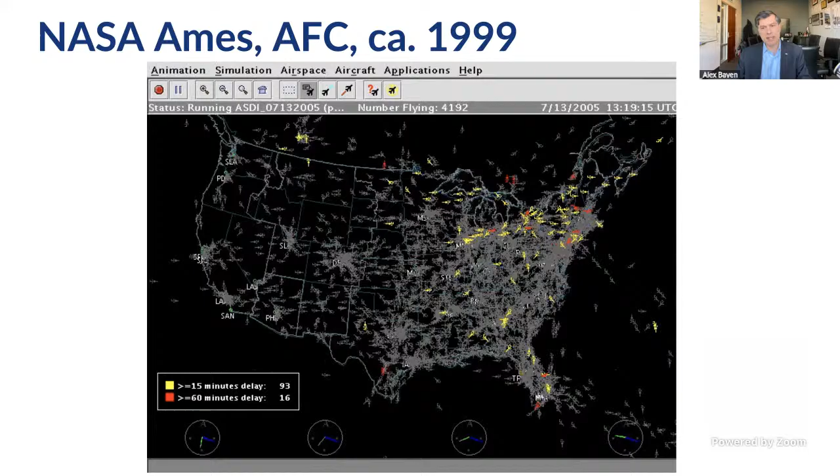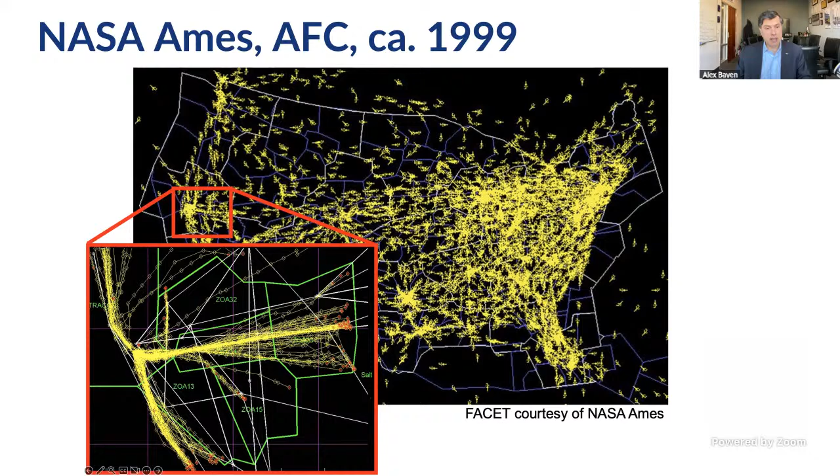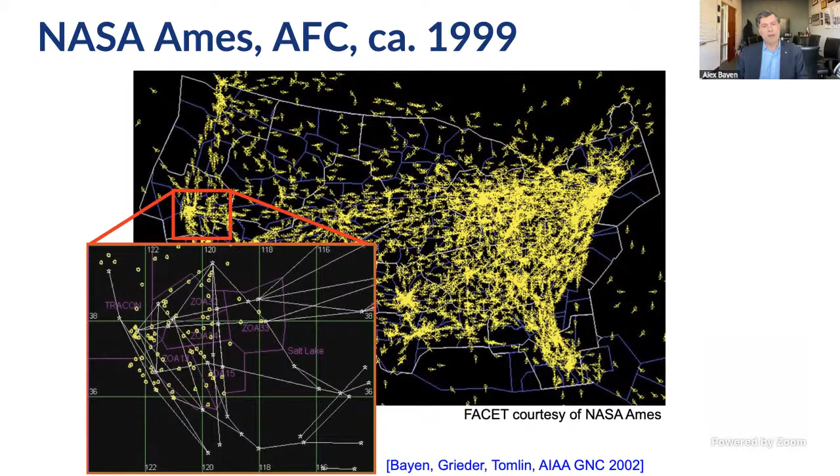And more specifically, some of the difficulties at the time arose in the arrival airspace because of the need to sequence aircraft onto the runway. And so the job that I had as a PhD student at NASA Ames, when I was a PhD at Stanford, was to understand how we could use the modern frameworks of the time, which were hybrid systems, almost a precursor to CPS. And the paradigm, we're talking late 90s, was essentially that we would use the FAA architecture and lay on top of it a set of controllers that can be compatible with the framework.

And the framework at the time had humans in the loop, just like today it still has humans in the loop. So there's a command center which issues very high level directives, and then centers manage multiple sectors, and then sectors work within a given framework and deliver aircraft to the descent and arrival airspace. And so the framework at the time was interesting because in some ways it was already driven by language, but language meant at the same time humans, and at the same time what we thought was a good modeling framework at the time, which is the framework of hybrid systems.

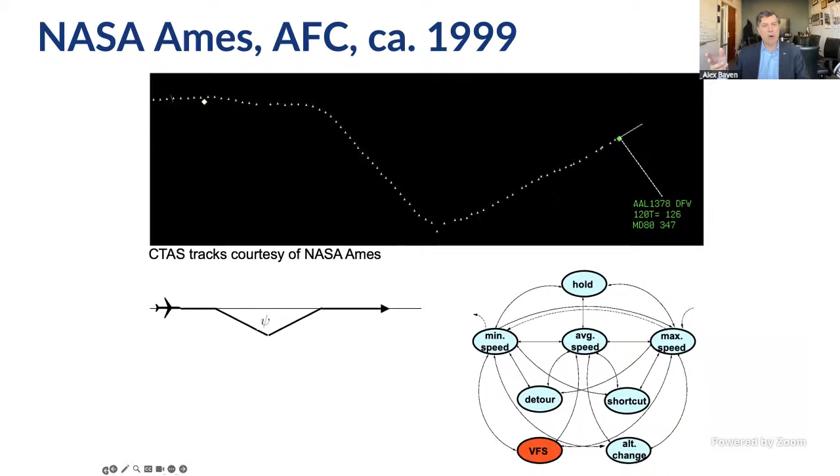So for example, if you told at the time an aircraft to hold, it would be a pattern where they would fly in these loops, which I'm sure many of you have experienced upon arrival if there is too much traffic on the runway. If the delay required for maintaining capacity was smaller, say you want the aircraft to be delayed by a minute or two, then you would do something called vectoring for spacing. And so on and so forth.

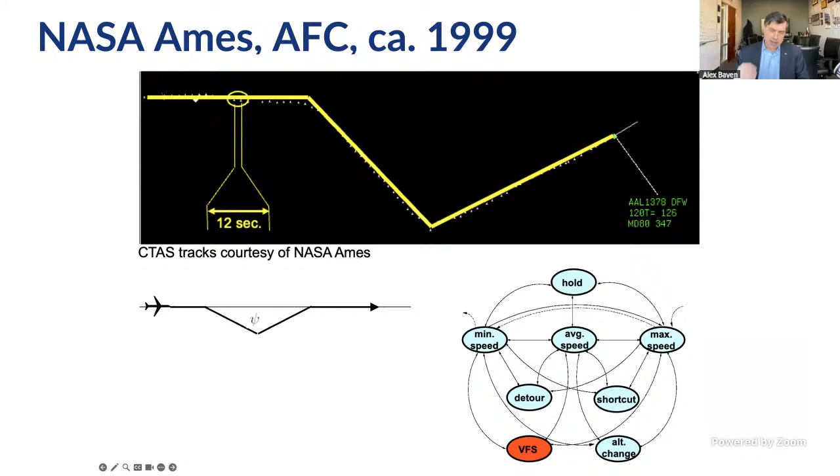And so the idea is that when humans talk with pilots, these things are conceptually easy for pilots to do, and they're easy for humans to verbalize over the radio. And you can see that this is way before LLMs. This is way before even NLP was anywhere close to being able to transcribe this automatically in a way that could enable automation. But the mathematical frameworks for this were already the center of a lot of interest to the community.

And so the idea was that you could essentially work on the synthesis of controllers that would jump between these different modes. And if you summarize the job of an air traffic controller at the time, it's really a way to communicate with the pilot, like switch from this mode to that mode. And then the pilot has a mental model and knows how to do that, which in turn gave rise to a lot of interesting dynamical systems models or hybrid systems models to model aircraft, with the notion that maybe one day an optimization paradigm over hybrid systems could enable this system to work better, and ultimately for this system to be decentralized, or what was called free flight.

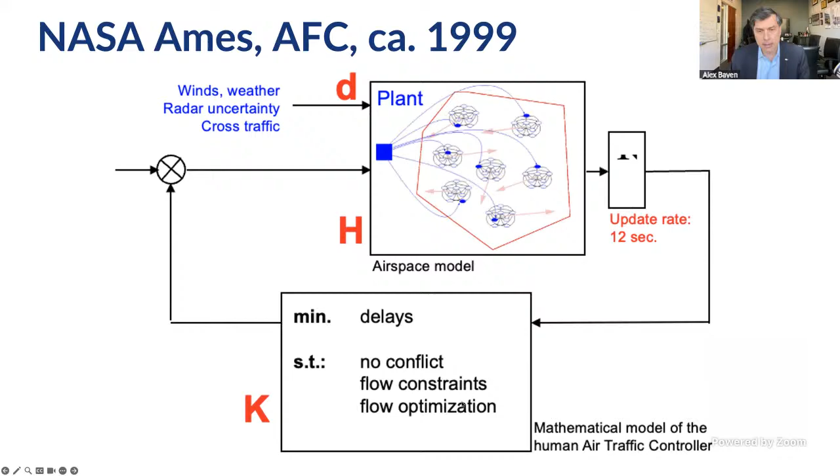And from a controls perspective, in some ways, it's really thinking, okay, so I have a bunch of hybrid systems flying around, and what I'm trying to do as kind of a management of the system, centralized or decentralized, is to build a controller on top of it.

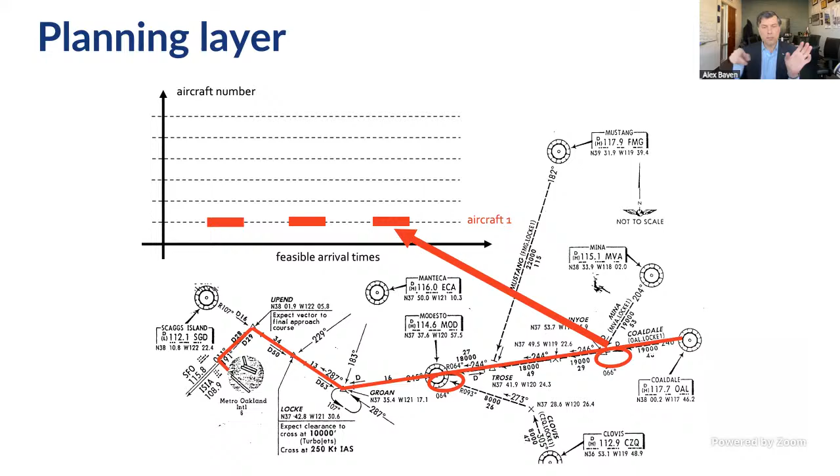So for example, in the very final arrival of the airspace, the idea is that you could fly direct to a destination point, and depending on your descent speed, that will give you a range at which you can land. And then if you're delayed on the way because you take one loop around that point, which is a possible place where you can hold, well, you have another landing strip. And so a third if you do two sequential loops, etc. And like this, you build these kind of landing maps, and you can see where I'm going with this.

It's almost like a feasible set of a mixed integer linear program where you're trying to sequence aircraft across non-convex landing strips, which enable the aircraft to be sequenced and separated on the runway. So you can see how with this, you can essentially achieve high-level planning in a way that is compatible with something that maybe one day will be verbalizable automatically.

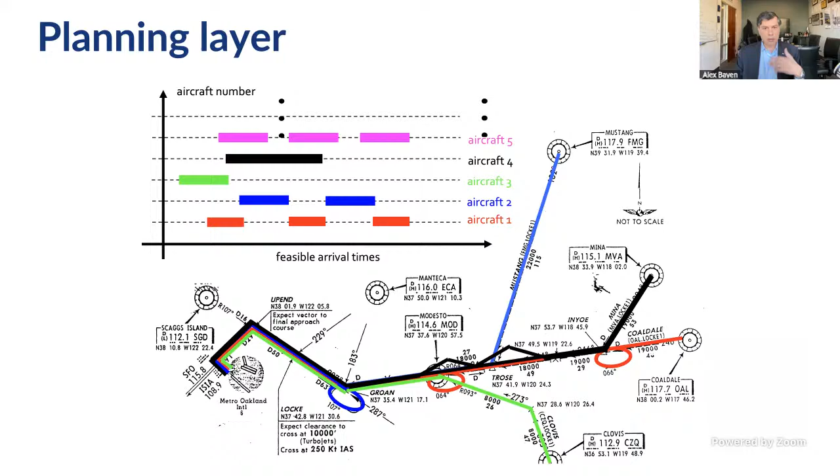At the time it wasn't, but at least it would enable the pilots to work with a traffic controller by being compliant with what was happening over the radio channel, and yet be able to automate that, or at least execute these if they were not flying automated aircraft. And then, of course, at the lower level, you wanted to also ensure that there's no collision.

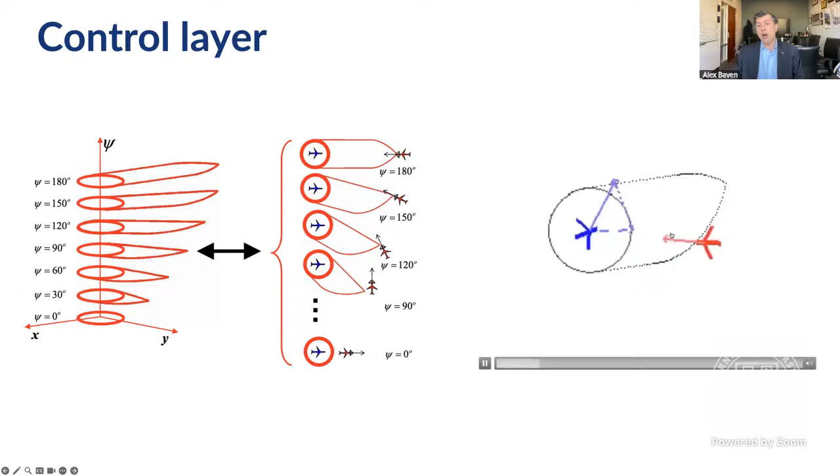So there was a lot of very active work in the Hamilton-Jacobi space, where essentially you would model aircraft as hostile to each other, where one is trying to crash into the other, because if one is trying to crash into the other and you have a controller that always escapes, that's kind of a suicidal attempt. In some ways, it's a version of robustness where no matter what the opponent does, you have a way to escape.

And that gave rise to a lot of the very common today Hamilton-Jacobi framework, which originates with the work of Shankar Sastry and Claire Tomlin in the mid-90s, and then the next generation, my generation, took over as PhD students until the advent of numerical analysis enabled the computation of these solutions in maybe 3 or 4 dimensions.

And at the time, we tried that on specific air traffic control routes. This is an example of flights at the border of California and Nevada, to see if there would be an opportunity for this to run onboard the aircraft, ultimately giving rise to a possibility of a little bit less supervision of the human from the ground and a little bit more decentralization of air traffic.

Some of the students in the group, in particular Rodney Teo, even went as far as implementing this on drones. This is an example of the algorithms that I described earlier that ran in early 2000 at NASA Ames on some of the drones that at the time the students had to manufacture themselves. You couldn't just go and buy things. You just had to build these things, which is why they look so old.

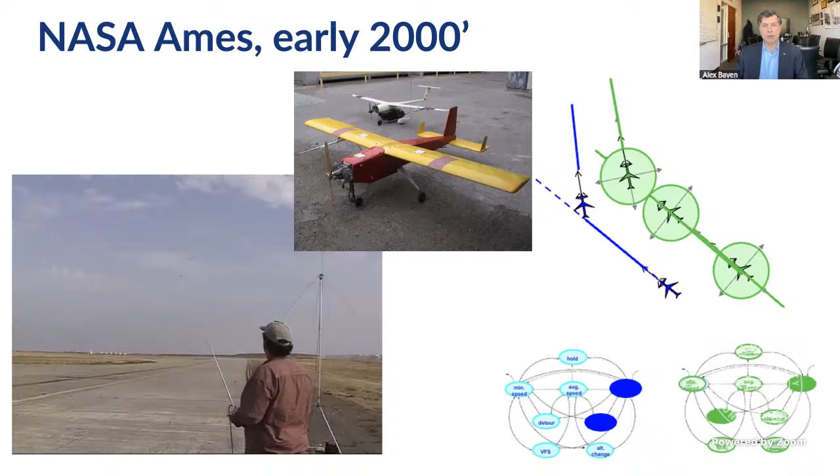But it showed that at least the commands that we issued in the simulations could one day be implemented in automation. So at the time, I think in the early 2000s or late 90s, it was really exciting because people really thought that this would be a next generation air traffic control that might happen in the en route airspace.

And then this happened. September 11th. This is what happened. This is all the aircraft in the United States landing right after the attack in New York, and you can see this is probably the only time in the recent history of the U.S. that the skies were so clear for so long following these attacks.

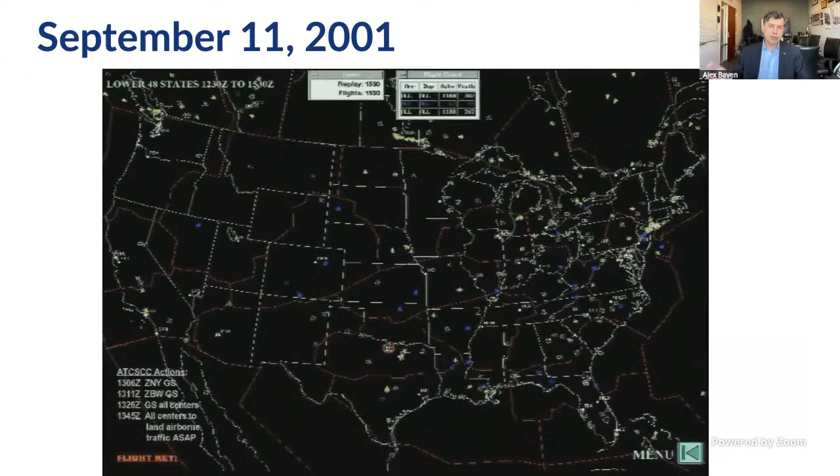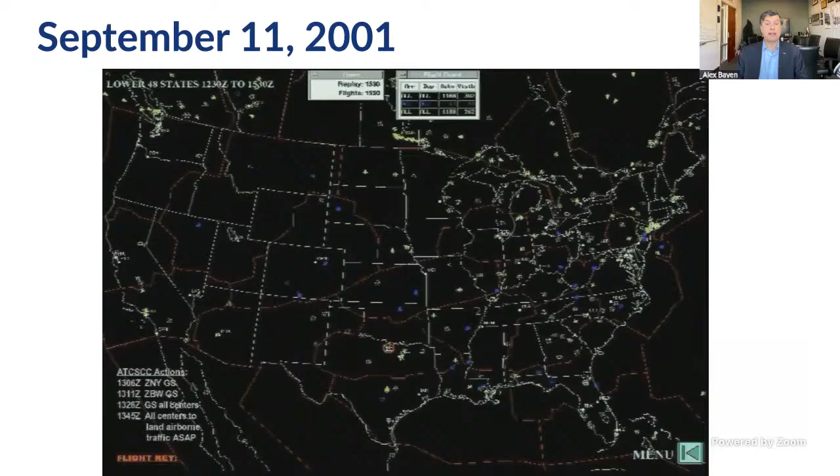Of course, September 11th drastically changed the approach. And in some ways, I think the research in air traffic control automation or human supervision or mixed autonomy really took a dip, maybe a 1 or 2 decades dip, which never really recovered at the en route level or even the arrival level. And it might have happened anyway, but I think certainly we saw a major shift in the way things happened at NASA at the time and even at the FAA just because of the new reality of geopolitics.

So at that time, this is when I decided to switch my research to something which brings us closer to what I'm going to talk about today, even though at the end you'll see they all converge. This was the time at which cell phones started to rise. And so now we're in the early 2000s or mid 2000s, and it's the rise of the IoT. And so suddenly there is a huge surge of information which was not there before.

I mean, in air traffic control, you work with a lot of good information because radar is pretty good. But anywhere else, for ground transportation, information was very poor, very sparse, until phones came along and people thought that you could use the GPS on board the first generation smartphones to monitor traffic and provide information of traffic at global scale. And so this project, which essentially took place at the time we were winding down on the air traffic work, was the first traffic app that was ever deployed in North America to enable traffic information systems to relay real-time information from smartphones collected by these things.

So this is an E71. That was at the time the latest smartphone in the Nokia brand. iPhone 1 did not have a GPS at the time, and there was no Android. Android came a few years later. So we built this first system and we deployed it in North America on RIM phones and Nokia phones. And over the course of 2 years, it enabled us to produce what you see on the right, which of course everybody here has now on their phones for free everywhere all the time.

But at the time, you have to recognize that in 2008, if you were looking for traffic information, the screenshot of the website is really what you would do. You'd go to a desktop, you would just click, you would look at the route which has congestion, and then you would just hope that things stay that way. We were very excited about that project because it was the first opportunity for us to do a lot of data assimilation at scale with partial differential equations where you have Lagrangian measurements, which are essentially measurements along the phenomenon you're monitoring.

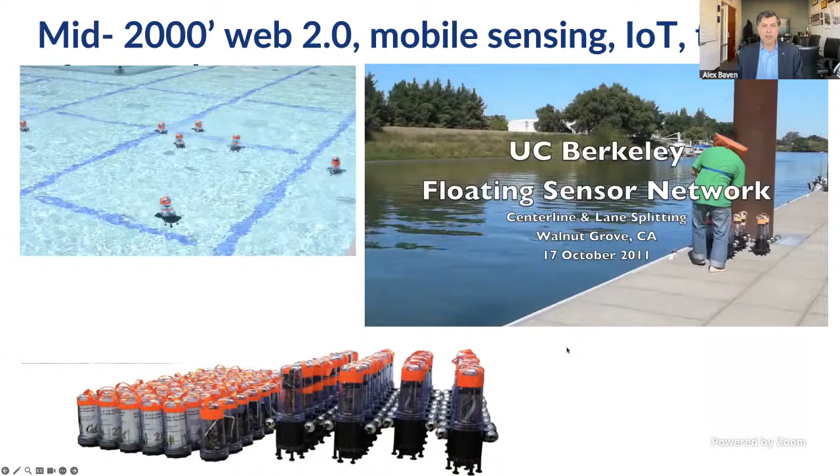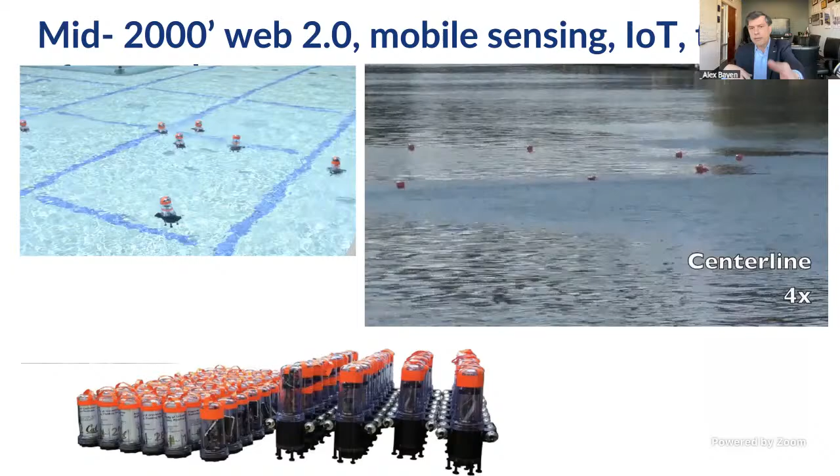And so along that same token, because we were really interested in Lagrangian monitoring and still in the context of these multi-agent systems, we also were interested in water monitoring, which is not that different in some ways from traffic monitoring. You have some form of stream, and the stream pushes the little floaters, and then the floaters can monitor, they can move eventually to monitor things where you want them. They can radio it back. In fact, this was the first time that we put floating phones. Each of them has a phone inside. And then the same algorithms in the background enabled us to essentially reconstruct the traffic in real time.

So what you see here is some deployments of these sensors from our boats. And then you can see some aerial view of what they are. And you can see particles that are modeled by either the shallow water equations or very easy versions of Navier-Stokes 3D, with real-time data being streamed in by this.

And this is important because I think today in automation of the large-scale systems we're interested in, there is a closed loop where the monitoring is now possible. This was not possible for sure 20 years ago. So this was the first attempts to do this with traffic, like I showed, with water. Then we also did that with earthquakes. And so this is here another interesting thing.

As you remember, iPhone 2 had accelerometers in it. And so we were the first app that monitored earthquakes by using the accelerometer data from the phones. And then what you see here is a shake table. So these are usually built to shake big things you built out of concrete to test their resistance. But here, what we wanted to demonstrate at the time is the ability of a very low quality accelerometer to capture accurately an earthquake, which has a pretty low bandwidth. Obviously, these are slow variations.

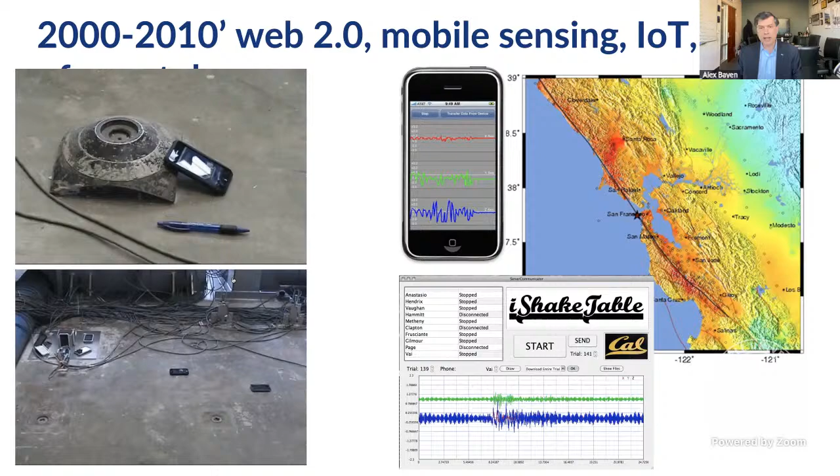And again, with the same idea, with the rise of the IoT and Web 2.0, it would become more and more possible for large-scale infrastructure systems to stream data or natural phenomena to be captured by these, and the phones were one of the many vectors that was possible. And so that led us to the idea of large-scale control of networks. So since we couldn't really do it in the air because the paradigm had been frozen after September 11th, we decided maybe some of the same techniques could be used on the ground.

And so at that time, smartphones were rising and data became available, at least if you're working in infrastructure systems. This is an example of data we collected from the 500 taxi cabs in San Francisco. Just to give you a sense, this is now, say, around 2008 to 2012. Today, there's 40,000 registered Uber drivers just for San Francisco. So the scales, even between then and now, are logarithmically at least one or two above. But I'm showing this because this is how in some ways the infrastructure came online.

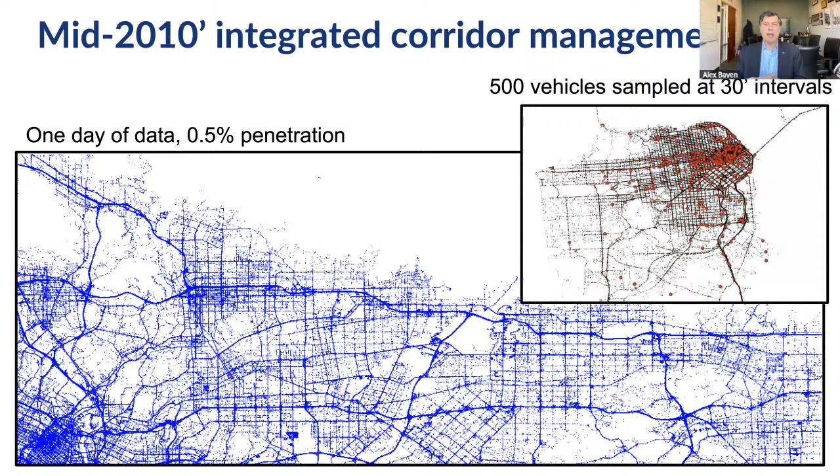And at that time, we had probably written over a dozen papers on data assimilation. So how you take these mobile measurements and you include them into live traffic maps to operate the infrastructure. So that enabled us to start thinking about how you build such a system. For example, for the geography we were interested in at the time, about 2010, typically for a corridor in LA, like the 210 corridor you see here, which spans a few suburbs of LA, you'd have something like 500 control points. So that means essentially there's 500 traffic lights you can probably integrate into a single decision support system and use that data to improve some of the metrics you're interested in.

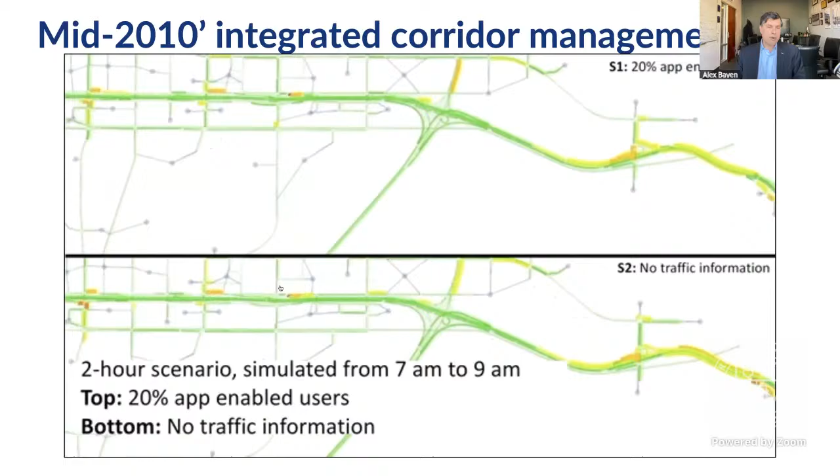Some of the metrics might be travel time, might be total vehicles traveled, might be VMT, might be CO2. There's different metrics. They're not all aligned. But the idea is that we were interested at the time to put these infrastructures online. And so we were doing this also in light of traffic information. And the idea there is that if you have an accident, and in one case 20% of the people have a smartphone and follow their smartphones, traffic will behave a certain way. That's what you see above. And if they don't have that information, traffic will behave a different way. And that's what you see below.

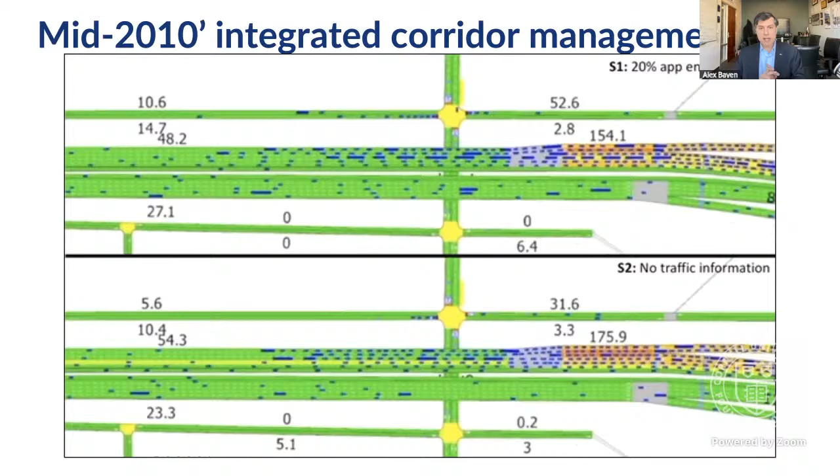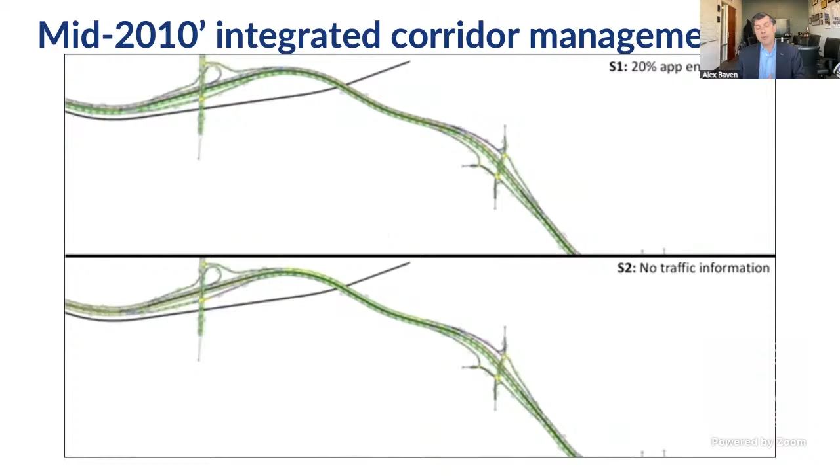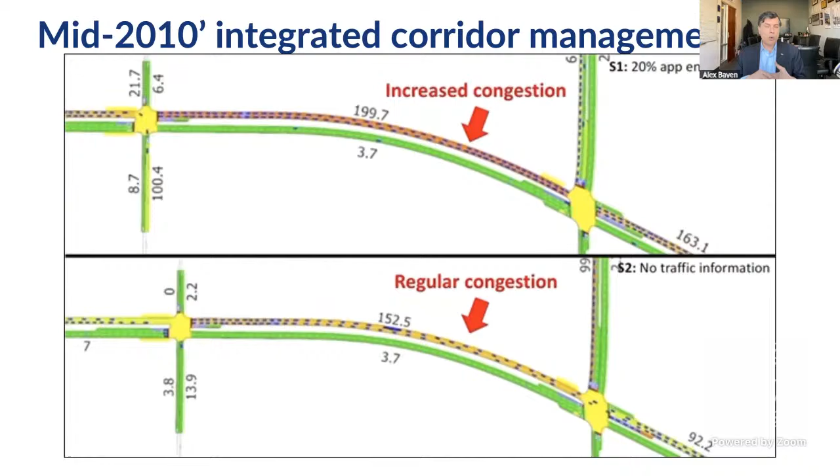And paradoxically, as many people discovered in the 2010s, the more information you give to people, sometimes the more problems you can create, because everybody gets the same information at the same time. And there's some very classical economics theory which shows that then people will all choose the same route. And because of that, instead of creating a social optimum, you'll create something which is closer to a Nash equilibrium. And then there's a price of anarchy. And the way it materializes itself is that it increases the level of congestion, when in fact, if people had not been given the information, paradoxically, things might have been better. So at that time, the whole ecosystem of control theory was discovering this paradox in practice. This paradox has been known for a very long time.

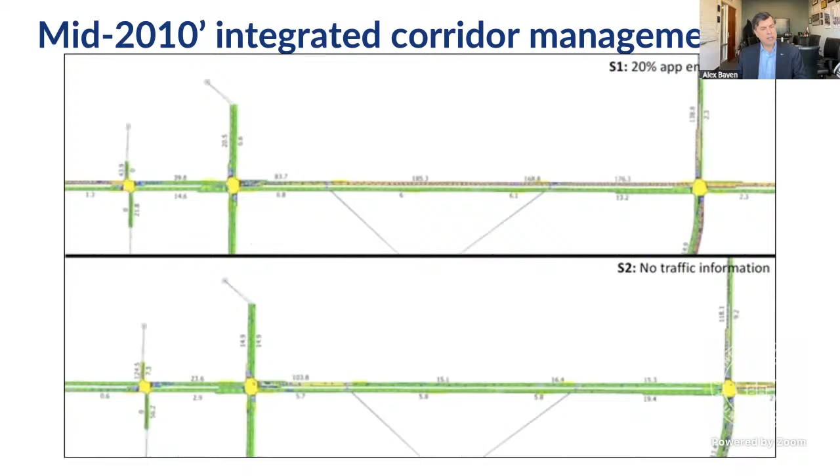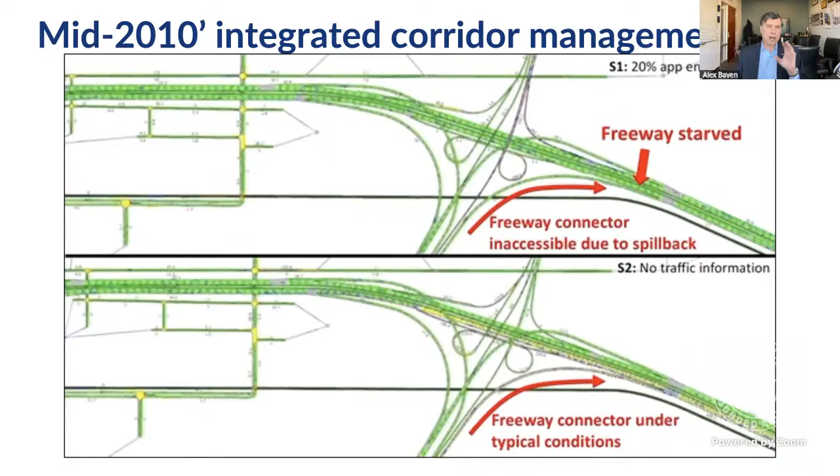I mean, I think the PhD of John Nash is in the 50s, the Nobel Prize was in the 90s. But it was the first time that things began to grow at scale so much that people could experience it. And so these are things we were interested in at the time in terms of the multi-agent controls that we were using for the traffic light coordination system, and possibly the idea that we could one day coordinate the information in the way it's conveyed to people with the infrastructure management.

And in some ways, it took 15 years for this to happen. So we realized that problem in 2010. And finally, we have a paper coming out in a few weeks with a major traffic information company. I can't tell the company because the paper is not out. It's going to come out in Nature. But this is the first time that this type of paradox was realized and implemented in an actual smartphone app to provide routing guidance that is not going to lead as much to a Nash equilibrium as you could.

And so this is another interesting thing because the reason it took 15 years is that the interface between what's happening at the infrastructure level and what's happening at the private sector level for these guidance systems is jurisdictionally very secluded. So fast forward now 5 years, we see cars coming up with some levels of automation. So say the late 2010s is glorified cruise control systems, then adaptive cruise control systems, then maybe one day cooperative cruise control systems. And then some companies like Tesla were among the early ones starting to suddenly raise the level of automation from 1 to maybe aspirationally 5, which we of course see now, or close to 5 with Waymo.

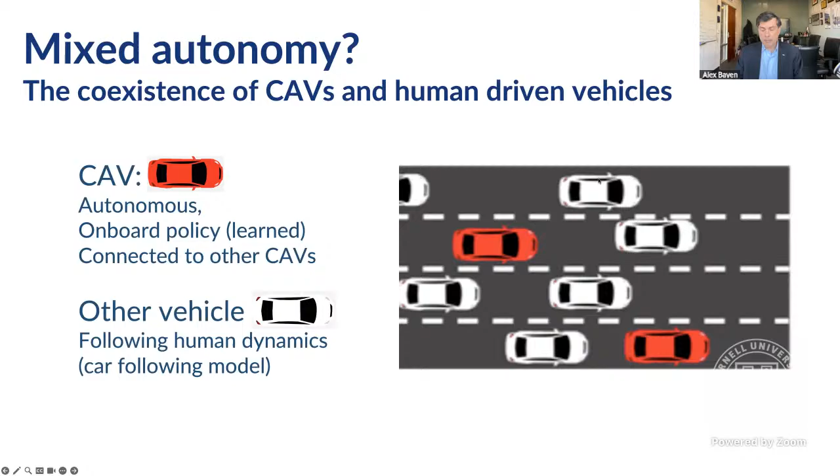So for the next 20 minutes here, I'm going to use a color code where in red we have some vehicles with some level of automation. So not fully automated. Think of whatever car you can buy where there's some form of autopilot which will wake you up if they need you, and otherwise will probably take care of you. And then they interact with other vehicles, like my vehicle, which has absolutely no automation, that I drive myself, and therefore have a specific behavior, which is the behavior of the humans driving it.

And there, the idea is that the V2V paradigm is not there yet, and it's going to be probably a decade and a half before it's there. But with very crappy systems for transmission, such as the cell phone system, very unreliable, very low bandwidth sometimes, very high latency sometimes because of coverage, you could still transmit information kind of like in the old air traffic control world, very high level, but you cannot transmit reliably high bandwidth information, which is an interesting control problem now, because essentially you could possibly use this to do high level coordination of vehicles, hoping that you can develop a low level controller that can control it.

And with that, do what we used to do with air traffic control: if you give some information to specific vehicles that have a distributed capability to control the entire traffic flow, you possibly could improve things on the ground. So we became interested in building a system where, so this is the beginning of cloud now. So we're talking 2014, 15, 16, 17, where running things on old stacks of computers was becoming obsolete, and the cloud could support much faster paradigms. And the idea was to have a very fast computational framework on the cloud, transmit very high-level guidance to vehicles, so low bandwidth, high latency, and then the vehicles run a local controller that could absorb this information to improve traffic.

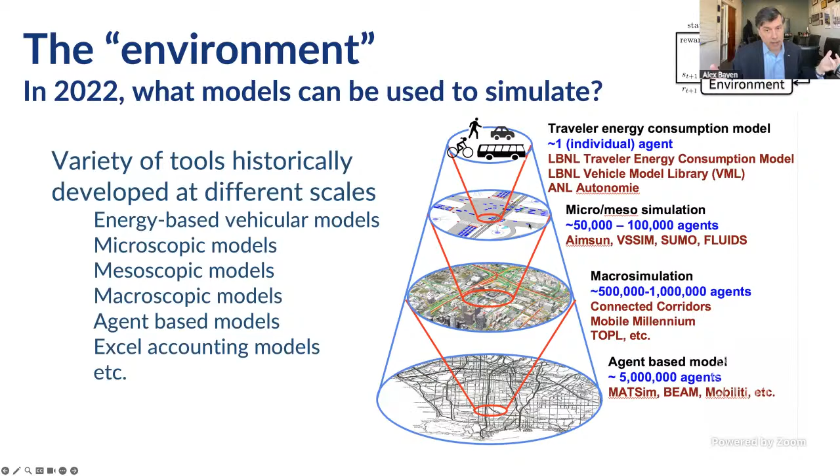So when I started at Berkeley working on air traffic control, that data and that compute was not there. When we started working on this integration in the late 2010s, so 2018, maybe 2020, not only was the compute power there with the advent of AWS, but also the data I've shown was enormous. And so now there was enough data to do simulations with maybe 50,000 vehicles and then run them in batches to teach an algorithm how to devise a policy.

So in 2017, we were the first group to integrate these three things on the cloud. So the cloud was the platform now. RL libraries were coming out of the lab, very fresh and open source. And traffic simulators were tractable in the compute environment we had. So we built that platform.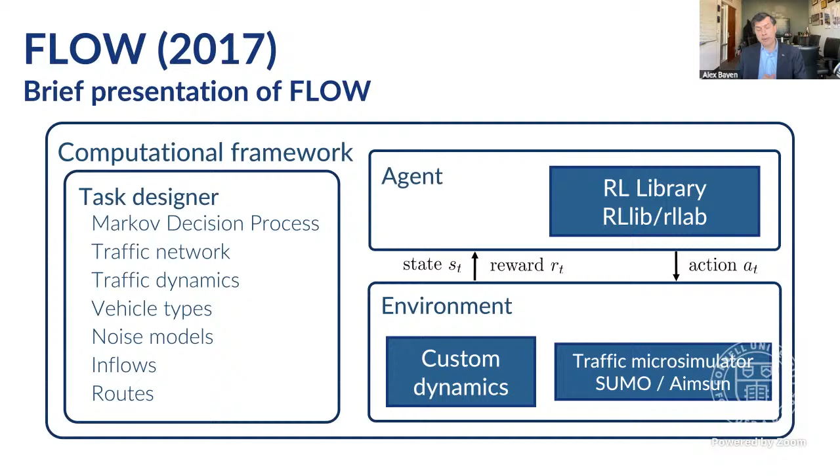We called it Flow. In fact, Aimsun, which is now owned by Siemens, rolled out their first cloud version for us. We were the first implementation in the history of the company. And of course, at the time, SUMO was an open source framework we could use as well. And that's the platform we use to train our policies.

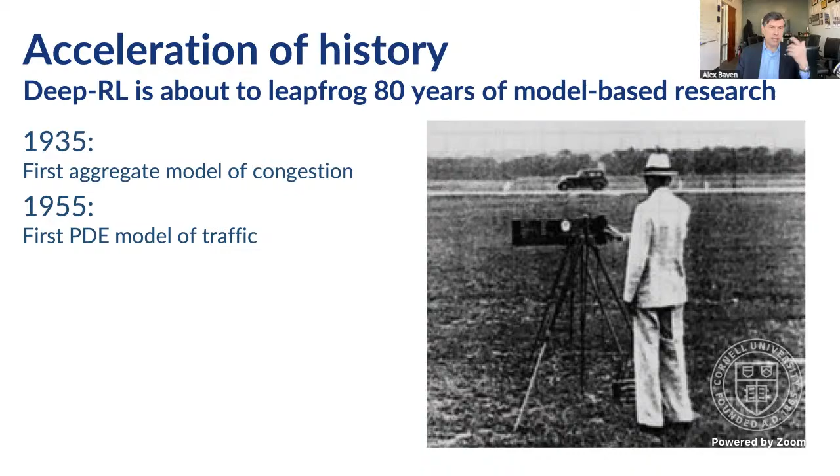And so this is an opportunity to maybe do a little bit of a leapfrog back in the model-based research world, because traffic models have been around since the 30s. This is a picture of Bruce Greenshields, who built the first aggregate model of congestion, at least to our knowledge. It took 20 years for the PDE community to notice and integrate this in hyperbolic first-order conservation laws. And it took another couple of decades before people started thinking about instabilities in these things.

They actually measured the gas and the fuel consumption. And so this was eye-opening for us because suddenly we could see the convergence of deep reinforcement learning with field operational testing at a time when stacks in vehicles could enable such things to work at scale. And so this enabled us to rethink the agenda.

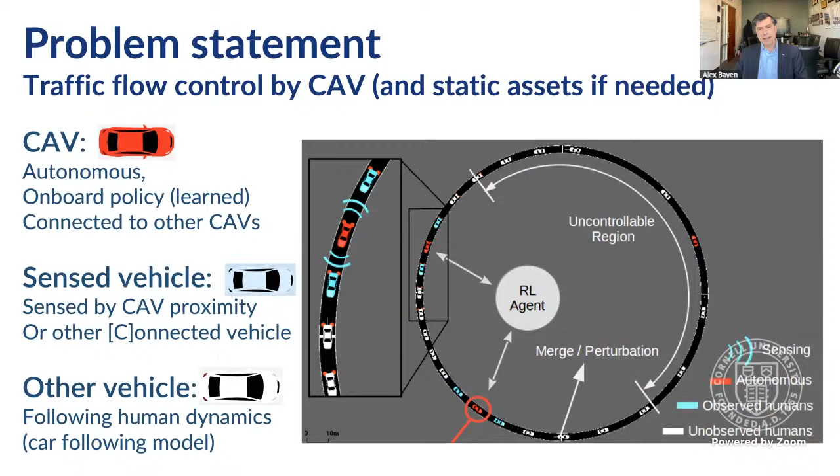So we tried that on a variety of settings at the time. For example, you can generalize this setting to a two-lane ring. And so it's interesting because here the policy discovers that by switching lanes obnoxiously, like I'm showing now, you can stabilize two lanes by disabling people to pass you and forcing the speed on them. Obviously, it's black box deep reinforcement learning. So I'm just verbalizing something which the PPO we used at the time discovered by itself.

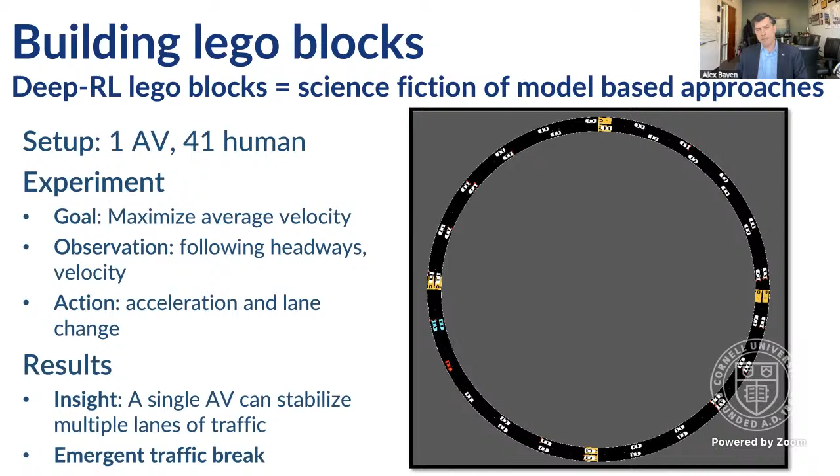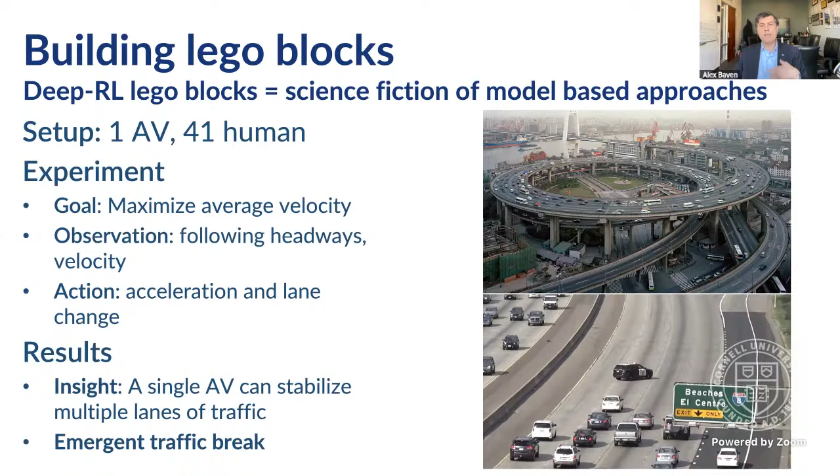And you could say, well, that's pretty intuitive because in some ways that's what a snail operation does, right? A snail operation is something used by the police when you reopen an asset like a bridge. You don't want people to go 150 miles an hour, so you kind of limit the speed up front. So you could see maybe the deep reinforcement learning had some form of human behavior or emergent behavior it captured in the optimization, but it was certainly not by design at the time.

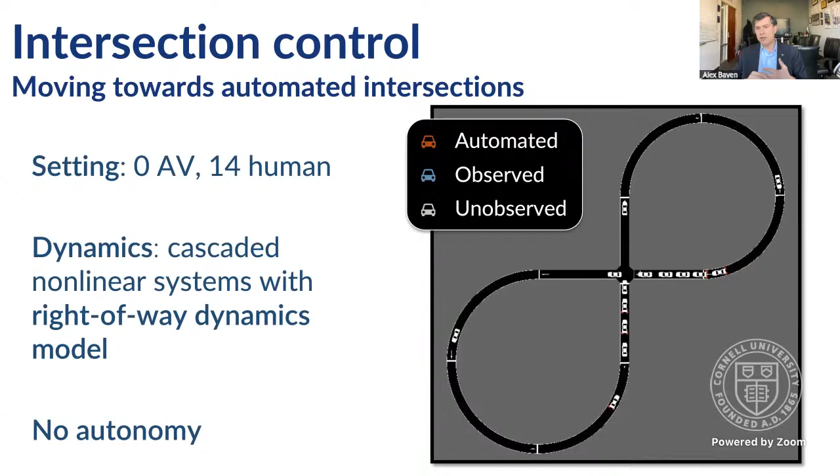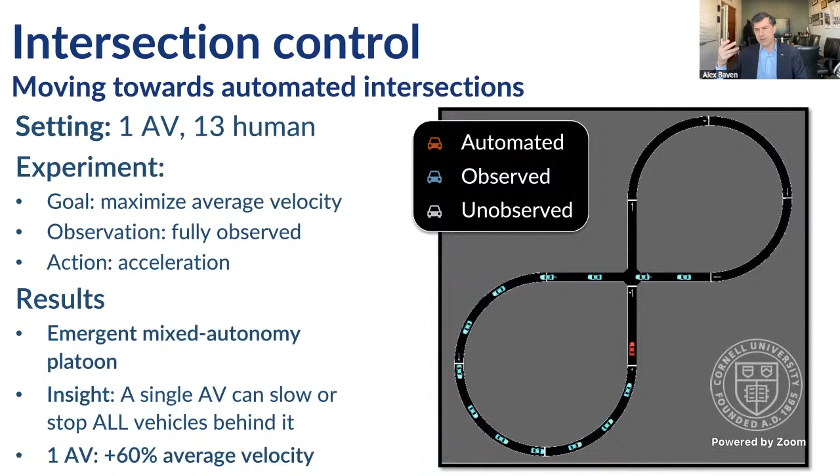Other things we were experimenting on is things like this, which is the worst possible way to manage an intersection. You put stop signs, which maximizes both travel time and emissions of CO2. But if you make sure the algorithm has vision over all the vehicles, it actually learns the proper speed at which it should travel. So the intervehicular distance makes the length of that snake into half of the 8 figure. So it's kind of interesting that, again, it figured this out. Which is another way to say that it rediscovered platooning if you plot this in time-space diagrams, for people who have taken a transportation engineering class and used that framework.

I'm going to skip a bunch of different things, but other things we were trying to do is transfer learning. It's like, can you learn a driving policy on a ring and implement it in real life? So the idea is that here you want to test things where waves are generated at intersections. So when there's an intersection, it creates a back propagating shock wave. And when that back propagating shock wave happens, then this is when the energy inefficiency happens.

And then so if you have knowledge of that shock wave, the car figures out that it should slow down, because if it slows down early, then essentially by the time it reaches the merge point, there is no more wave. So in some ways, it has enabled all these vehicles behind it to not stop and go. And so the savings are quite substantial.

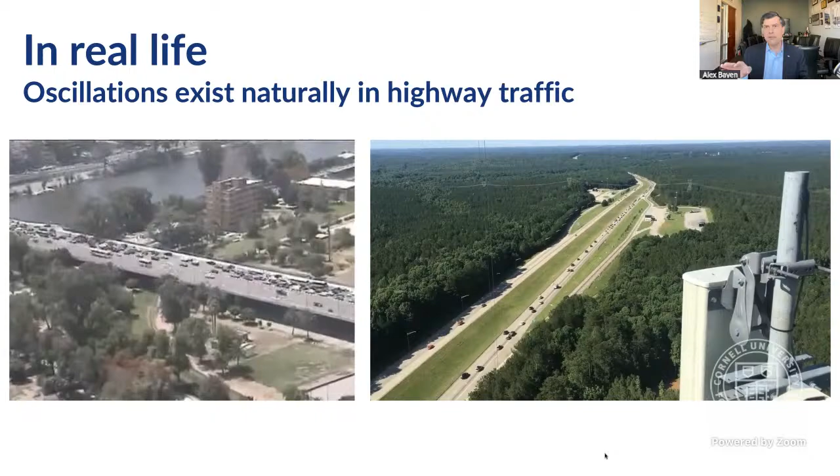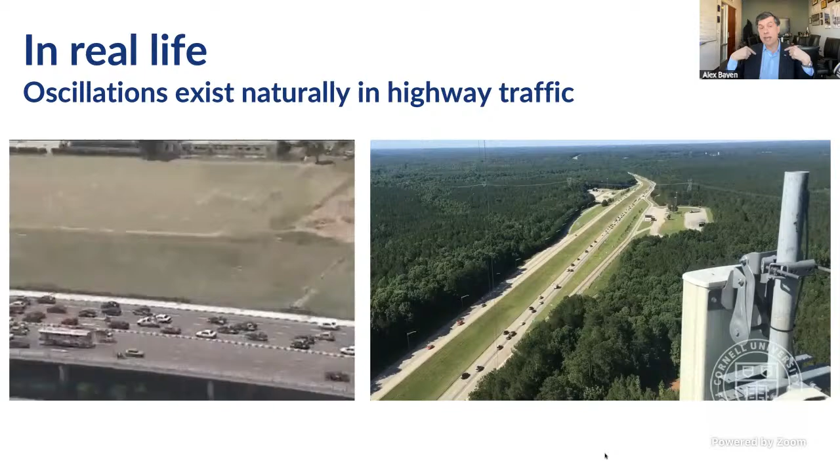So here we're not trying to fix traffic in fixing this. We're trying to fix human efficiency with automation, which is a very different problem. We're not going to change the number of people going onto the freeway. That's not our ability, but we have the ability to change their behavior once they're on the freeway.

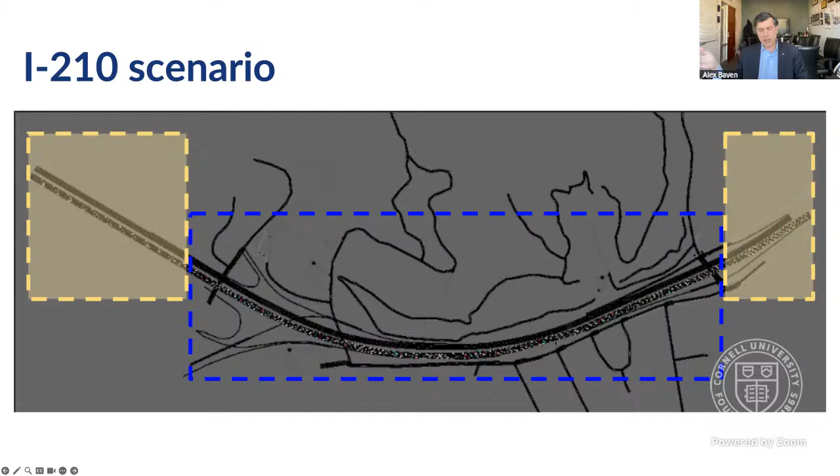So to tackle that problem, we first thought that we would use the setting I showed you earlier in 210 in Southern California. And so we started building these gigantic models. And so it's going to be hard to see over Zoom because there's a bit of a stroboscopic effect given the frequency and it's an accelerated movie.

But what you should see, if you see my mouse, is there is a pocket of shock wave that is forming on the right, and it's progressively back propagating into the box. Now it's entering the box, and if you look in the box, suddenly traffic gets much slower, and then you have these oscillations back and forth.

There's a bunch of red cars, but right now the red cars are not turning on the controller. And then in about 15 seconds, you're going to see blue cars appear. And when that happens, that means the red controllers have turned on the policy they learned in black box simulation.

So here the notion was, why don't we use a fully calibrated micro simulation model that we happened to build for District 7 at Caltrans? And why don't we use that to devise a policy that would run on these? See, it happened now. The cars turn blue.

So now visually, I don't know if you can see this over Zoom, but things are much smoother. The total number of cars flowing in and flowing out does not change. We don't change the supply demand inbound and outbound ratios, but the flow has way less variance in speed, which is what this mixed autonomy work we were doing is trying to achieve.

So that was the work at the time, and so then we went to talk to a few agencies and demonstrated that we could run this in hardware. So the idea was to do transfer learning from pure simulation to hardware. So this is far from being the I-210 in Los Angeles. This is the last NSF CPS meeting before COVID.

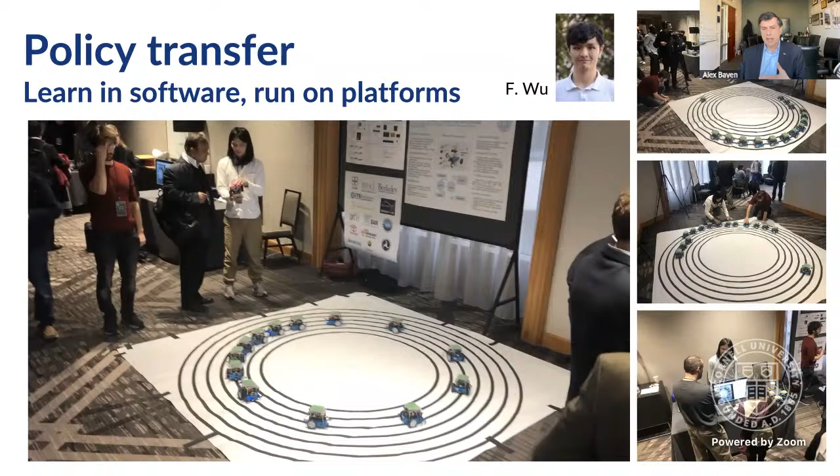You can see Eugene Vinitsky on the left and Fengyu Wu on the right. And this was a way to demonstrate to the NSF that we can run this in the hardware.

And of course, this is, hi, Andreas, this is your stuff, back in the days at University of Delaware, and I know you have a much better version here in Cornell. This was another example we ran together with Andreas's group to show that we could transfer. This was a sequencing policy. You can see on the right.

We control the vehicles in a way that the last vehicle leaving the roundabout, which is the Hummer on the right, leaves before the one on the left, which is the baseline policy. So showing that this sequencing policy we had learned in black box deep reinforcement learning could be rolled out from the simulation to the hardware.

And this experiment that we did thanks to Andreas's group at Delaware, so the Gen 1 simulation city, was essential in us going to the DOE and saying, look, okay, we've pushed it as far as we can in the field of hardware. We're now ready for real-time deployment.

And Kathy, in the meantime, has joined Waymo, and so it's a nice continuity also in terms of the industry and where students work. So going back to the experiment of 2016, this convinced us that we're ready for larger experiments. I'm going to skip the 2018 experiment that was run by the Vanderbilt team.

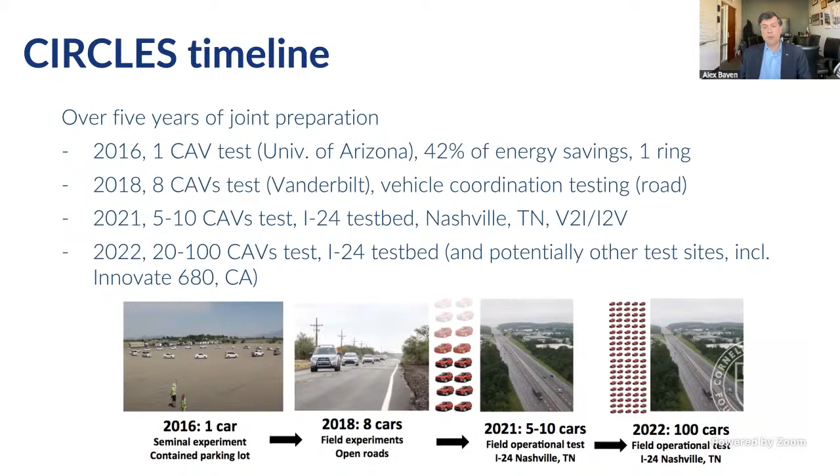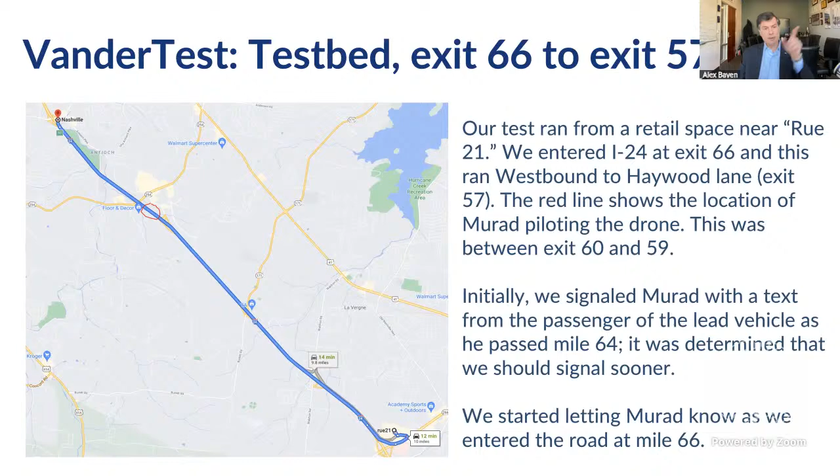And essentially then came 2021, kind of the middle of COVID, we decided to do a 10-car experiment in which we could essentially control things on a single lane of freeway at scale. So we chose a stretch of road close to Nashville and Smyrna, about a 5-mile stretch of actual deployment. And essentially proceeded in some form of funeral style.

So putting all the vehicles on the freeway in a sequence and then letting them operate on the freeway without controlling people, which essentially means, for the experiment, we ran 4 actuated vehicles in red, some extra vehicles in blue we had inserted just for monitoring the experiment, but not controlling, and then a bunch of people in between that come in, come out, and merge into your lane.

And what we noticed, so we managed to catch usually 1, 2, sometimes 3 waves over the experiment. You can see them in the trajectories. Here, red is when you slow down. And what was really encouraging at the time was that we were able to demonstrate a saving of 16% in our own vehicles that we could measure. So essentially saying, if you run the algorithm, you save 16%, or you have 16% more miles per gallon.

But what's really interesting too is that if you look at the vehicles straight behind our vehicles, even though they weren't necessarily participating in the experiment, because they had to comply with what the driver in front of them was doing, they also saved energy. And of course, the effect goes down as you go further away from the initial vehicle. So this was very encouraging because all in all, it showed that the overall savings we should achieve should be really good.

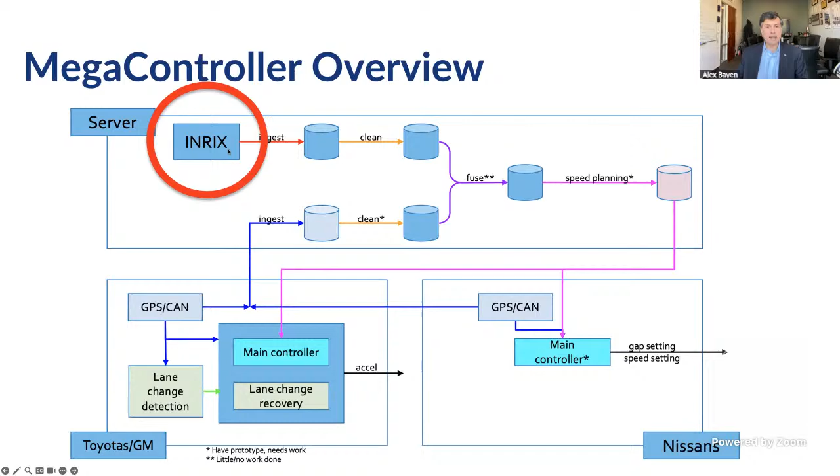So we built that system, and now it's interesting because if you think of my very first diagram of the air traffic control, where you have a planning layer and a control layer, this is not that different. So ideally, a system like this operates at a very high level and queries data in real time. So for us, we bought data from INRIX, and that data looks pretty crappy. I mean, that's not their fault. It's just the granularity at which it's produced.

So every 500 meters you have a speed measurement, but you can still differentiate with very basic machine learning what is a bottleneck here, you can see the horizontal, and what is a stop and go wave. And the stop and go wave is what you want to shave if you're trying to save energy. So that type of measurement, which is ingested in real time, enables us to know exactly what the target is for the algorithm.

And so the idea is that at a very high level, on the cloud with infinite compute power, as much as you need, you can compute a speed plan. And a speed plan is essentially the same as what air traffic management will give to an aircraft. It's like, you're going to fly at this altitude, at that speed, and that defines your arrival time. And based on that, your sequencing is very similar for distributed vehicles. We're going to give you a speed plan, and at some point you're going to drive at weird speeds, which are not as fast as you could go, but that's how you smooth traffic.

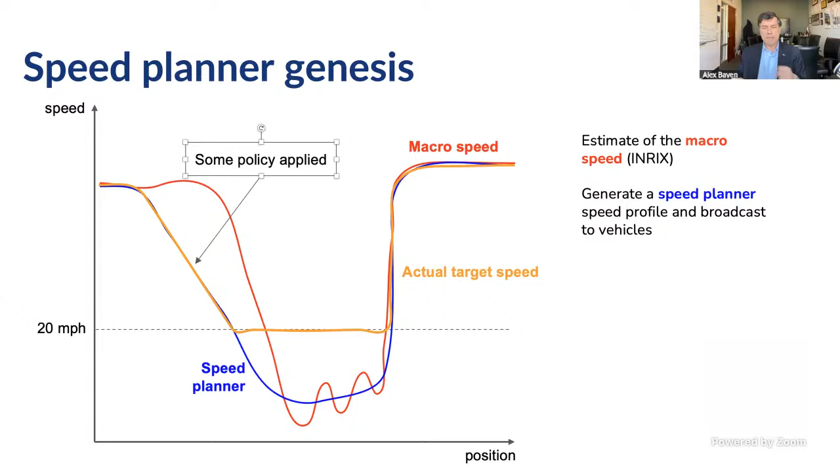And so there's many ways to formulate this. But one thinking at the time was that, in order to avoid what's happening often, which is the red thing, where you lose all your energy, you would want the blue thing here, which is much better. But because of social norms, you should not be driving on a freeway at 10 miles an hour, even though it's better for overall traffic, because people are going to be mad passing you, so you have to clip it at maybe 20 miles an hour.

And in practice, when you run this on data, that's what it looks like. So essentially, it uses this INRIX data I have shown with a space forecast at the present time, and then a time forecast if you have a forecast model on top of it. And then the speed planner defines a target speed, which is this orange curve I'm showing here, which is what you push to your vehicle.

And so that's essentially what you can afford to push over a cell phone network, because cell phone networks have these high latencies and low bandwidth, unreliability. But even if you push a speed plan 15 seconds late or 30 seconds late, the time scales at which the physics of this system operate is a couple minutes. So it's still valid by the time you get it because it's timestamped. So that is something you can reliably do over the cell phone network, even though you don't have a V2V paradigm with a very high bandwidth.

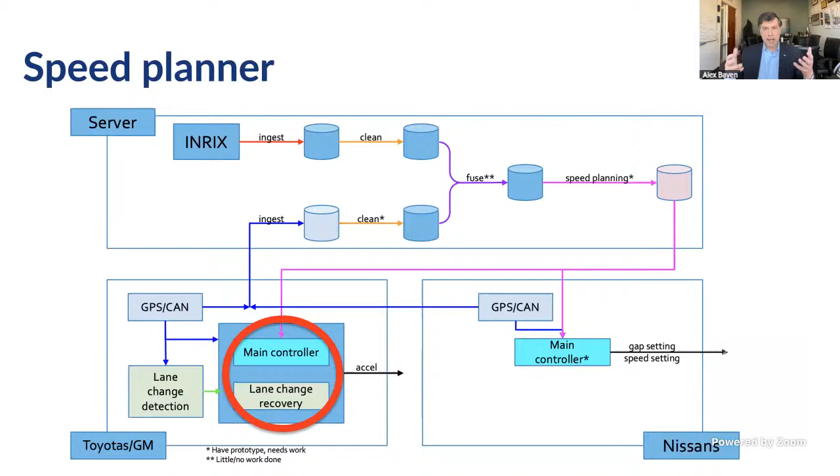And so the idea is that this type of data gets fed to the controller, and then the controller uses it as a target, and then does all the local level conflict avoidance and control. So for that, now we're 2020, and so deep reinforcement learning is very mature. There's lots of libraries we could use. So essentially, we used some reward functions that operated at the system level, in which we could reward vehicles for the energy consumption they would essentially incur in running these algorithms.

And it's complicated because for many people who have done reinforcement learning, there's a lot of dark art and magic in finding the proper reward function, so you don't get either absurd solutions where all the vehicles stop because it's better for energy, or other artifacts of the optimization, which are not very physical. So we had to add things like variance of the speed and maybe some norm of the acceleration and so on and so forth. And of course, deep reinforcement learning, at least the way we were using it at the time, is absolutely not certifiable and verifiable. That's just the way it was, especially if you're using black box deep reinforcement learning to learn the policy.

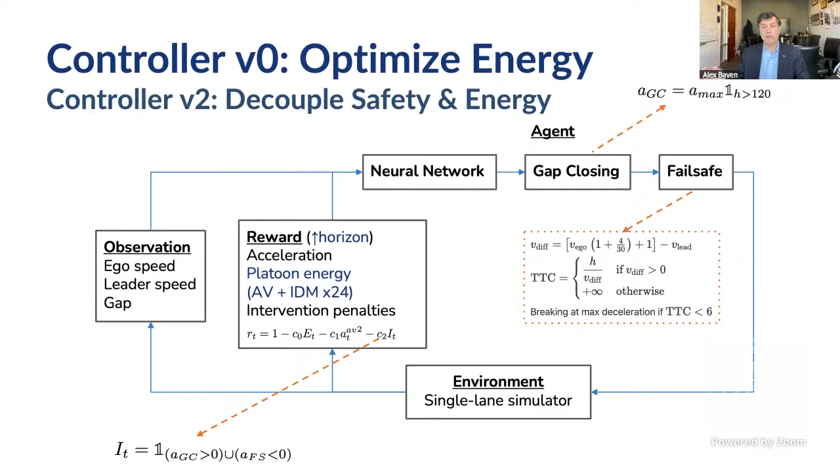You have to have some form of filter, which we used in our time in the form of the follower stopper, which is one safety filter. Then we had another safety filter with a clip function, and then the car itself has an anti-collision system on top of it. So there's like 3 layers of safety on top of it because it's dangerous. And what it does is actually pretty standard and intuitive.

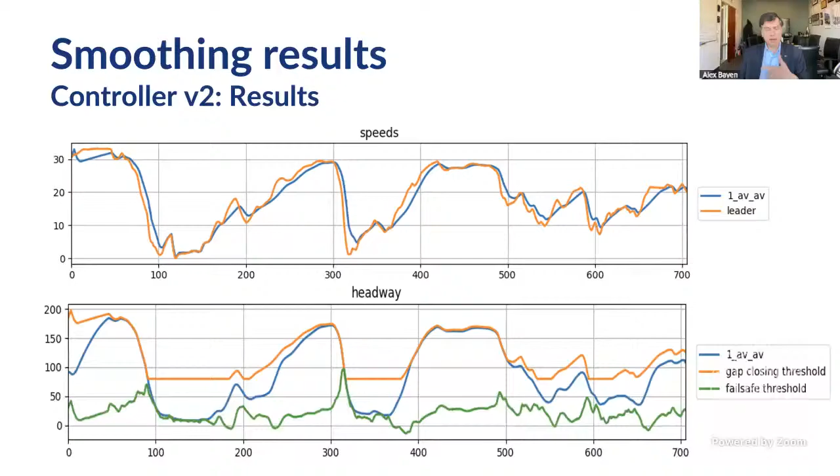And so all it's doing is it's using the speed target to understand in anticipation how much you would change your speed, and then the low-level controller to make sure that the policy as indicated by the speed planner is executable at the lower level and produces these savings. And so we could already see with single vehicles a lot of savings, and that enabled us to really gain confidence in terms of scaling this up to a larger test, which is when we created the MegaVanderTest.

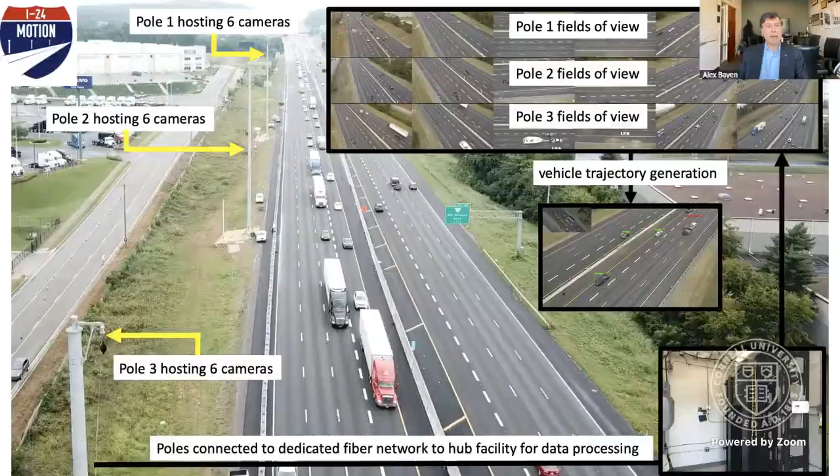So we brought about 50 to 70 students to Vanderbilt University, and a bit Ocean's 11 style, created our own org chart, and essentially rented a factory to host everybody. And first question is like, why did we do this in Vanderbilt? Because at the time, Dan Work and Jonathan Sprinkle were building this amazing test bed, the I-24 MOTION test bed, which is the best instrumented freeway in the world, by putting a bunch of high-resolution video cameras every 500 meters on that stretch of freeway.

So this is a multi-million-dollar investment from the state of Tennessee and a variety of other agencies, which Dan Work and Jonathan Sprinkle put together, giving us an opportunity to be the first test run on that freeway to demonstrate the technology. What you see now is they are erecting these poles, and this is really a couple months before the experiment. We were really lucky with the timing here that they were building that huge monitoring infrastructure, which we later used to produce the time-space diagrams that were used by the team to build the data. And so we put all the students into our field headquarters, which is this factory or offices we rented at the time. And then the students started mounting radios and all the infrastructure.

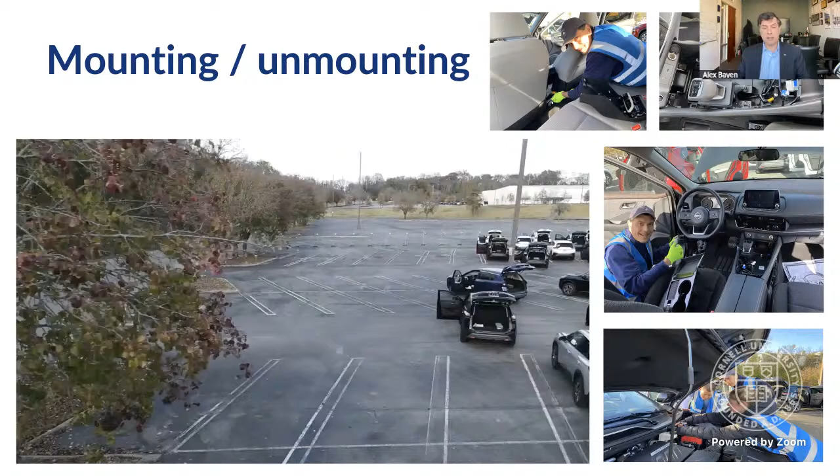If we're going to run an experiment with 100 vehicles, you need to build about 120 or 130 hardware, factoring the kind of break things along the way. And then they taught us how to unmount panels in cars. You can see all of us mounting and unmounting things, bypassing the electric system to power our own electronics from the vehicle, and so on and so forth. And essentially, one by one, deployed this into the vehicles that we deployed on the field.

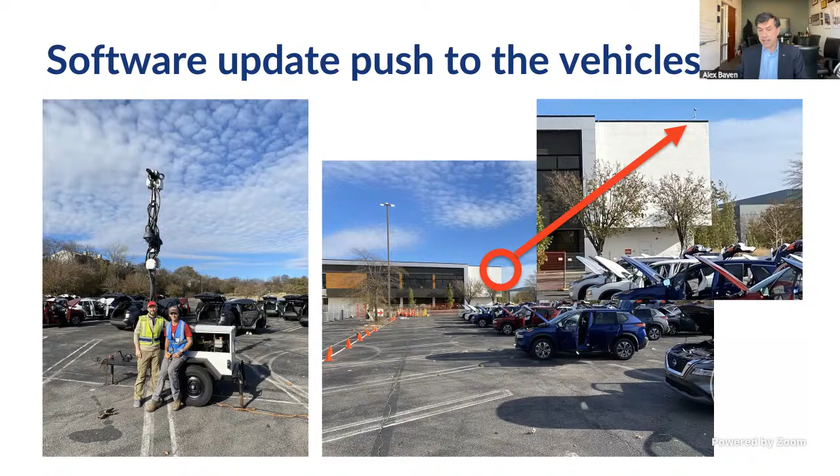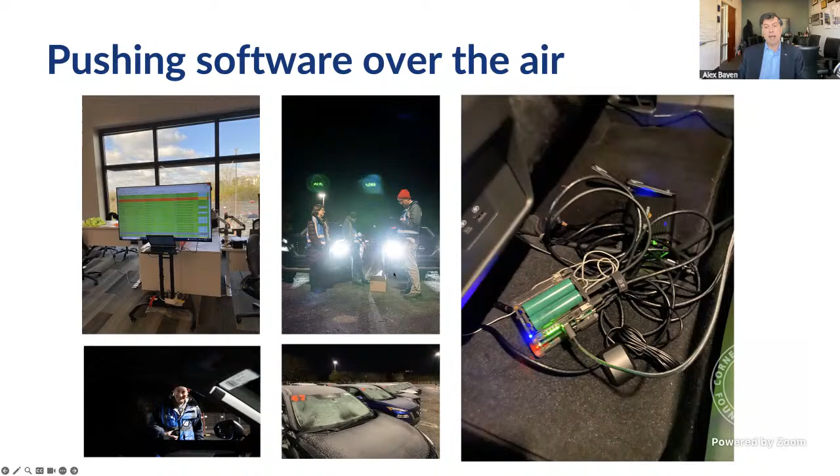We created our own Wi-Fi access points to ship vehicles directly the algorithm, so that every day when we would try a new algorithm, we can just Wi-Fi it directly to the vehicle. Vehicle downloads the code, compiles it on the Raspberry Pi we have in the vehicle, and can run the controller. And the Raspberry Pi has nothing particularly glorious. I mean, the electronics is very small. The good news is you don't need a huge computer to run this. It will run a local Raspberry Pi, and then you can just download this every day you want to do a new code.

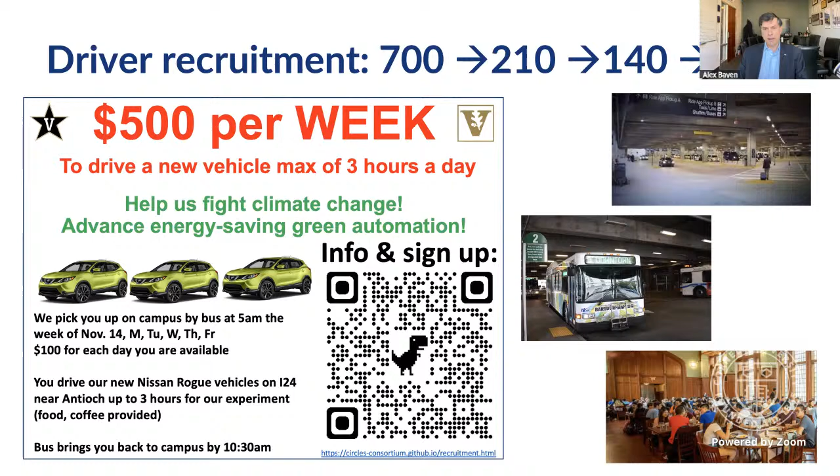We recruited a lot of drivers. It's interesting that to get 100 people drive at the same time, you probably need to reach out to 700 people. So anywhere from the bus terminal to the airport to the dining halls, we had to offer a lot of money for people to be willing to drive from 6 a.m. to probably 10 a.m. every day. So show up really early so we could catch these first waves.

So the drivers would come to our training facilities, they would be briefed the weekend before, and then every morning before doing the experiment, they would be briefed again just to teach them the basics of safety. Because they were essentially riding vehicles running algorithms that we had devised, and they were not professional drivers. We had cashiers, people who worked in the insurance business, retired teachers, all kinds of professions. So they're not professional test drivers; they're just normal people.

And then if you experience anything that is weird, that's probably normal because it's not your cruise controller. It's actually our algorithms running in the back, and it will show you things which you're not used to. So these 3 bars that tell you the specific intervehicular distance might change on the basis of what we tell you. So if anywhere along the road you're not comfortable, and it gives you target speeds that you're not happy with, you brake, it will automatically disengage the autopilot. And be aware that you're not running your typical cruise controller, you're running an experimental algorithm.

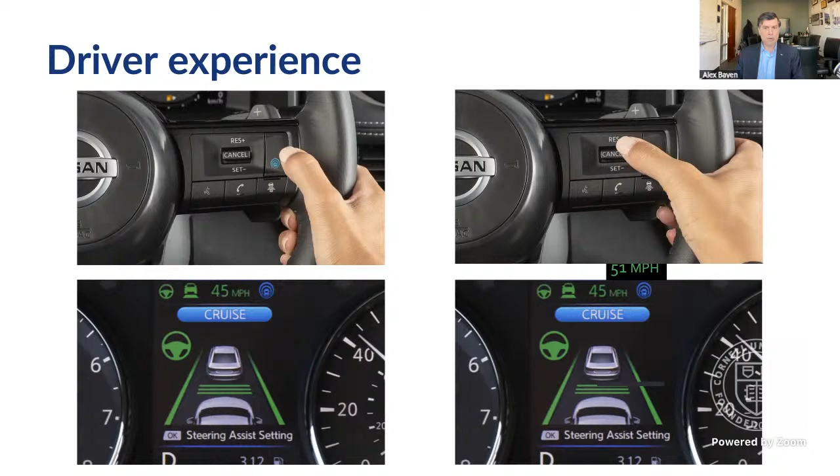So we give them these QR codes that enable them to drive back and forth on that freeway, so we could achieve the proper concentration of vehicles at a given time, which is what you need in order to manage traffic and smooth it out. We had our own police officer and headquarters security team here to make sure that if something happens, we can intervene in real time.

And essentially, we had a total of 100 Nissan Rogues that came straight out of the Nissan factory, 5 Toyota RAV4s and 1 Cadillac XT5, each of which running different algorithms or different builds of the same algorithms based on the 3-layer cake I showed you earlier, operating possibly at the same time on the freeway.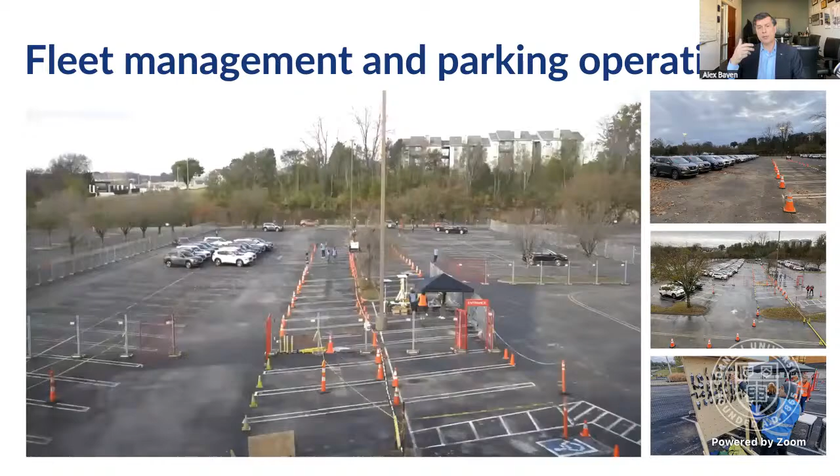So running the operation is essentially like running an airport or an airline. You release the cars around 5 a.m. in the morning when traffic starts to happen, and then you route them, and then you have a fueling truck, and essentially people run the experiment until traffic dies around mid-morning. And then in the afternoon, we would run smaller tests with maybe 10 or 15 vehicles in order to debug what has happened and understand how we could improve this the next day. So we ran this for about 2 weeks, essentially ramping up from 1 vehicle tests to 100 vehicle tests on the last day as we turn on the system.

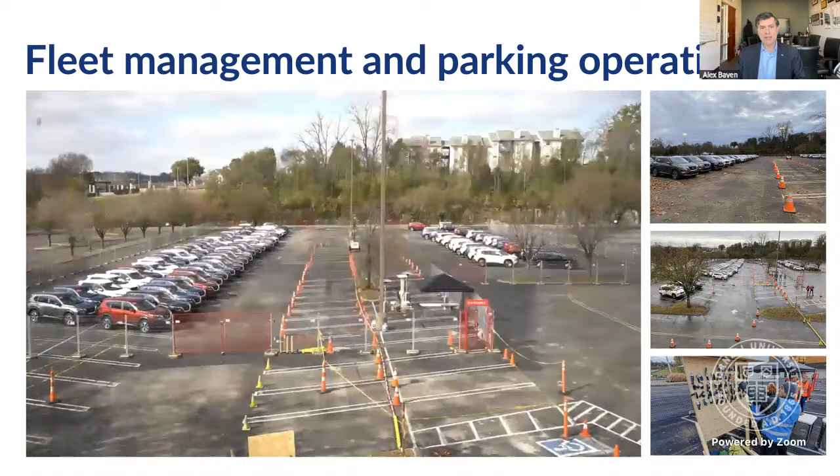So this is a couple pictures from the experiment. You can see Dan Work and John Sprinkle, who really were the 2 heroes who ran that entire facility. This is the Nissan chief engineer, Niels, and then Amaury Ayat from ESTP in France, GFU, and many others running these tests in real time as part of the crew. Most of the vehicles were just 1 driver in it, just doing their driving, but we also had our own crew in some of the vehicles to look in real time about just checking and how things were going.

We did run a press conference as we were doing the last day of the experiment, which was really nice because it was an interesting way for the community to find out what we were doing. We're trying to be very stealth initially so that people don't drive differently on that day, but at some point we had a lot of helicopter traffic of TV crews, so we decided to tell the press what we were doing on the last day so they also could be part of it.

So to give you a sense of the data we were collecting in addition to everything on our cars, the amazing test bed of Dan Work and John Sprinkle, the I-24 Motion, captures everything there is on the freeway, so it's completely crazy. That data is also complex because you have to track a vehicle from a camera to another, but classical machine learning does that. And so with that data, we were able to build what to this day I believe is still the largest time-space diagram in the world.

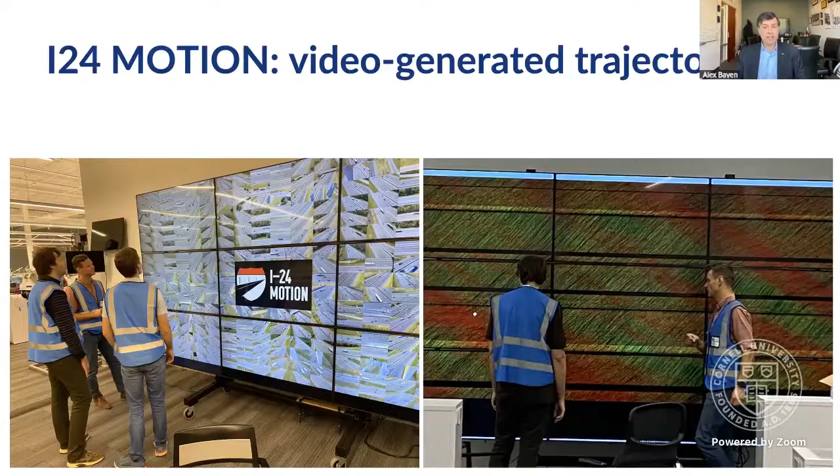So I'm showing you a downsampled version here. Each of the dots is a vehicle sampled at probably 1 hertz, even though the camera is about 60 hertz, I think, as a minimum. And the reason why these trajectories cross, this is across the 4 lanes, so we can also deconflict that. And then the white trajectories are the trajectories of the self-driving vehicles.

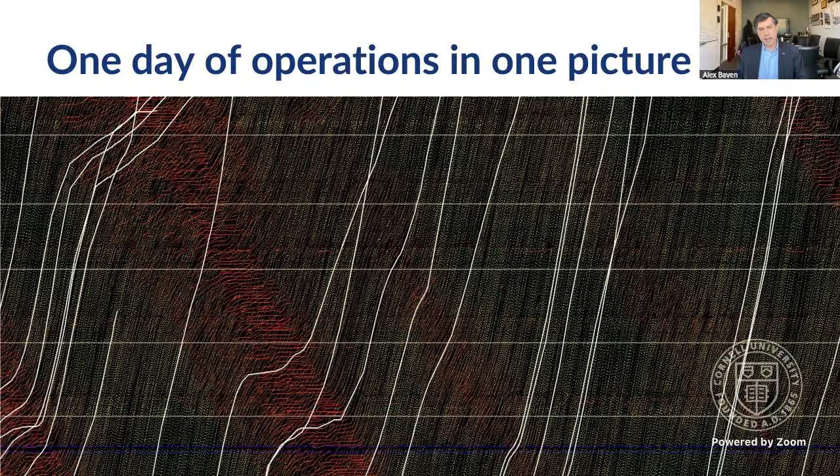And then to give you a sense of the scale throughout the day, that's what it looks like. So I'm progressively zooming out so you can appreciate the scale. And also the penetration. You can see there's not that many self-driving vehicles in that thing, and this is the whole day. So it's quite interesting to see that we have to be very soft here. So we did not remove the waves. We improved the waves. We improved the energy consumption of the waves greatly. I'll show you that in a minute.

But to remove the wave, you either need a lot more cars or a lot more aggressivity in the way you do it. Imagine a chain of tanks just blocking the freeway in the way the police can do that if they do snail operations. But this is the first time it was done at that scale. So we had to be very careful.

And we also had to be very careful not to be noticed, because as soon as people notice you change flow, they try to outsmart you. And then it creates a lot of other feedback loops that we did not model. So that was the idea, was to be stealth enough that we could do some improvement, but not so noticeable that we would be noticed.

And the way you can measure the improvements is by looking at things like variance of velocity acceleration pairs. So a typical pattern of stop and go has an oscillation between fast and slow. And then, of course, if you go from fast to slow, then you decelerate. If you go from slow to fast, you accelerate. So there's a positive acceleration and negative acceleration. And so the idea is that you really want to bring these two closer.

And so what we could show is that with the convex hull of the 90th percentile of these acceleration velocity pairs, we could greatly see that diminution, which characterizes itself also in the shifting of the speed distribution in front of an automated vehicle and in the back of an automated vehicle. So to assess the validity of what we're doing, you have to do statistics where the distributions you compute are the distribution of velocities with respect to the position of an AV over all the AVs.

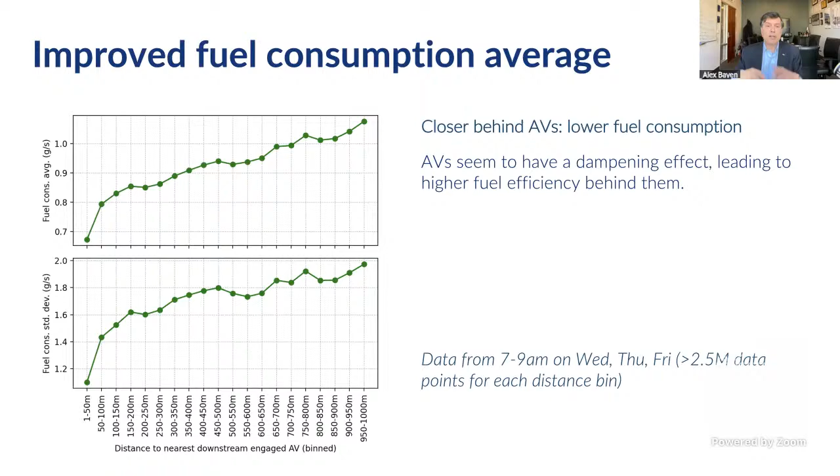And of course, we could plot curves showing the decrease of the effect. So the energy consumption goes up again the further away you are from the AV, and that's understandable because there's only so much you can do. You affect the vehicles around you, but the further you go, the less impact you have. So while we were doing this,

suddenly the world changed again, and then LLMs came along. And so we were interested to see if, as the very early ages of the LLM came along, we could use LLMs to reverse engineer what we had done. So in 2016-17, Dan Work and his team had an explicit controller called the follower stopper. That was the first algorithm. Then we came along and worked with them and had a bunch of deep reinforcement learning algorithms, which at that point became black box. So we created an interesting framework called CLEAR.

And what we try to do with that framework is see if we could get an early gen LLM to narrate to us what we were doing, which is what this movie shows here. I'm going to try to speak over the movie, but I'm going to let you listen to the voice for about 30 seconds and then explain it. Can you hear the voice speaking over here or not?

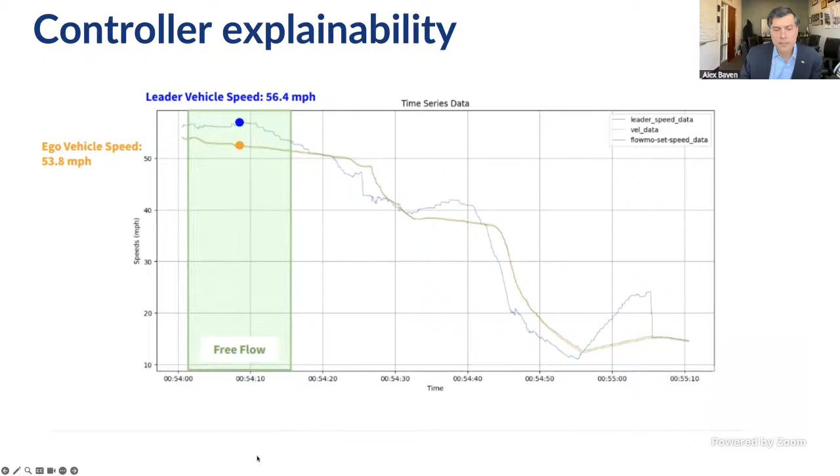Okay, so this is like black box LLM application to what we're doing. But the point of this is that we essentially give the LLM a variety of accesses. One way is we can show it the reward function, and then it can infer from that reward function why the controller chooses to do this. So it can figure out, oh, it wants to reduce the variance because it sees the variance.

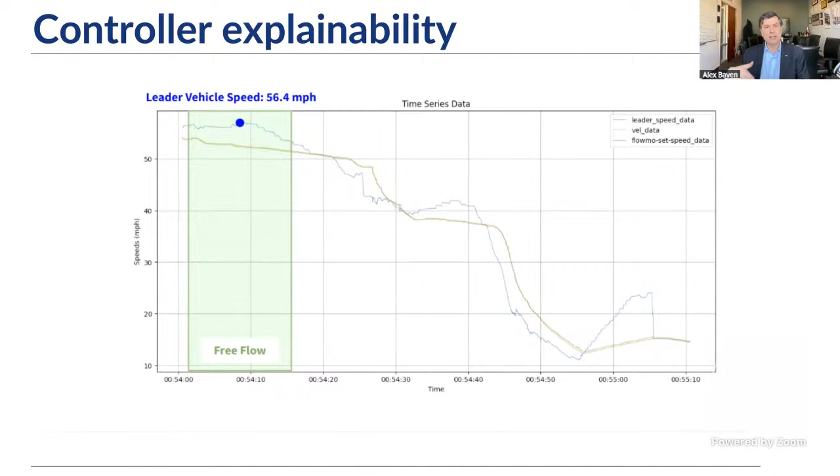And so essentially, it's very interesting because of what we wanted to show at that time, and now that whole thing is obsolete because this world is moving too fast. But it was interesting to see that even though the policies we were developing were black boxed, you could actually verbalize them in a way that a human would understand what's happening and why it's happening. And you can see now how we're converging back to the very beginning of my talk about air traffic controllers, because ultimately, if this goes in production, there needs to be a way for the human to understand what's happening if the human is going to feel more comfortable.

So going back to this very first picture I'm showing here, maybe now there is actually an interesting thing to be said about a rebirth of what we were trying to do 25 years ago, but for the low altitude airspace. In the high altitude airspace, I think that traffic operates in a very specific manner with humans in charge of air traffic controller sectors, and that's likely not going to change quickly because of the way the industry is set up, the infrastructure is set up.

On the other hand, on the ground, the economy of eVTOL, so flying taxis, but essentially electric vertical takeoff and landing aircraft, is going to boom over the next 10 years. And there is no FAA infrastructure comparable to the en route airspace to support it.

So regardless of legacy, that paradigm I was showing before, some version of this has got to happen over the next 10 years in the low altitude airspace. There's just no choice because otherwise there's going to be chaos.

So one thing we were interested to now look at is, well, now that we have this understanding of how the voice and the maneuvers can be connected, first because we tried to do it and didn't really succeed 25 years ago other than through classical optimization, but now because of the rebirth or the new revolution in the LLM space, maybe with joint embeddings, there is a way to see if we can map encodings of voice, which is available through radio for the low altitude airspace, with very specific maneuvers, either for descriptive purposes and design. And that's something that now, again, in this long after September 11th world, there is a chance to do that.

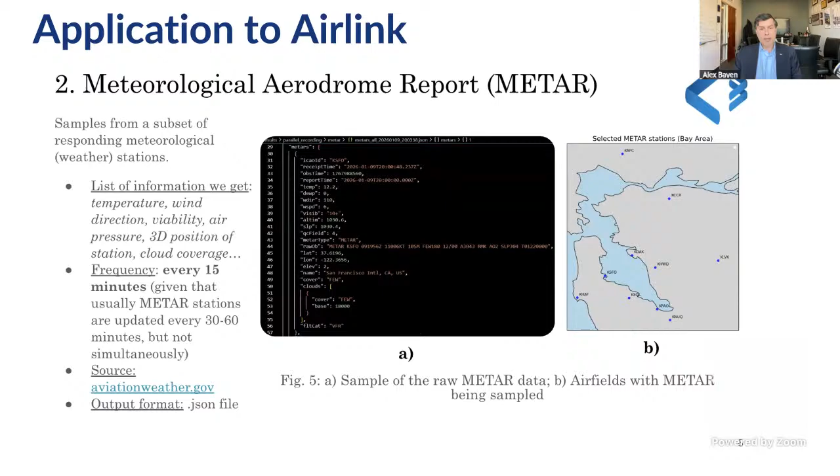So we've started working on this in the specific context of Airlink, which is this concept we have at Berkeley, where we would like to start connecting the different campuses in the UC system with eVTOL when that becomes a reality. And for that, ADS-B provides a really good set of data that we can connect to weather data and that we can connect to radio for which we can listen to frequencies.

And so typically, one of the visions we have is as we enable this California Airlink to grow, we would like to also experimentally try to see if we can start moving more towards the digitalization of the air communication in the spirit of later assisting maybe humans in charge of a much larger number of aircraft to coexist in that space. And so for that, we're looking at specific trajectories.

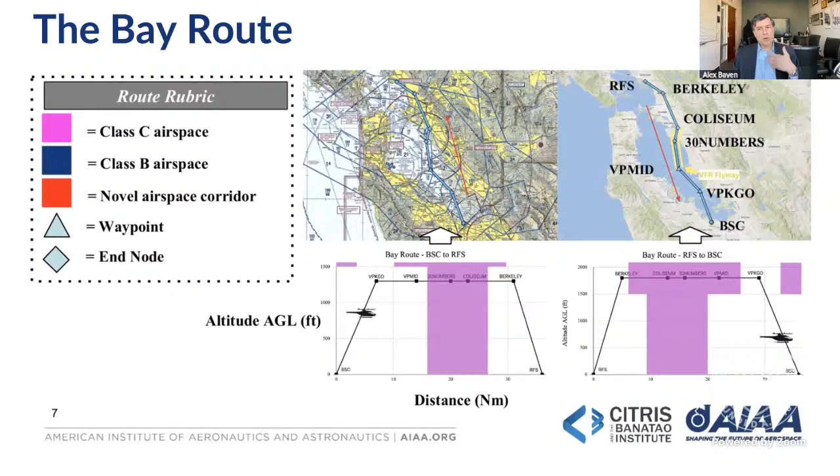This is an example of a flight plan between vertiport or helipad of Richmond Field Station at Berkeley and the Berkeley Space Center, and see how these verbalization could enable multiple aircraft to interact in a way that is at the same time compatible with human language, but also with maneuver design if we were going to do this at scale. And so this is essentially the end of my talk.

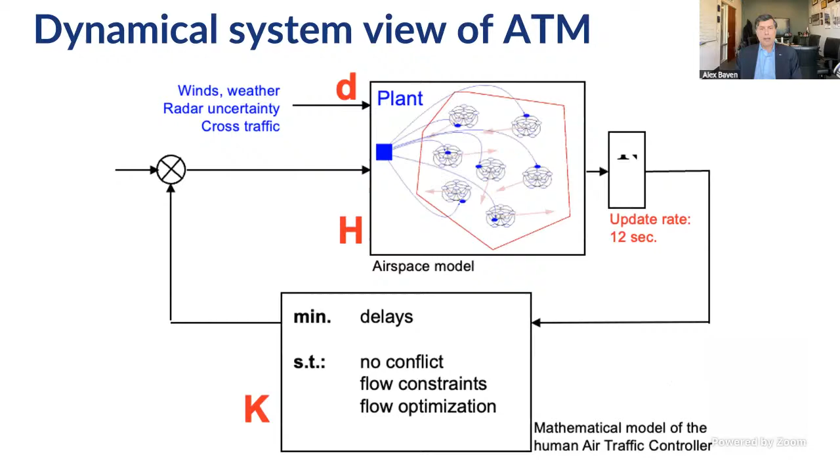In the meantime, could you explain a little bit the future directions that you presented? What are you planning to do? Okay, so let me try that. Yeah, so the idea here is that maneuvers are very procedural, and so maneuvers are usually verbalized or could be verbalized very specifically using FAA phraseology.

And so that is something that can be expressed, and the semantics can be modeled in maybe a higher dimensional space in order to do a mapping between what these commands tell the pilot to do with very specific state space variables in the system, which in the case of ADS-B data include lat, long, speed, altitude, climb rate or decrease rate, and heading, and a few other variables. And if that mapping could be learned, then this could become the basis of a language to do design over.

And obviously, there's going to be a lot of questions raised by that, because if this becomes a synthesis language, then you need certifiability, you need some form of verification tools to run on top of it. We're not even there yet, because we don't really know. This language is very messy, even though there is a phraseology, just like in military English, or like FAA has a very specific set of rules you have to obey. So the first step is really to understand if such a mapping is realistic or not. And we don't have a clear answer to that now, at least for the type of traffic we're considering.